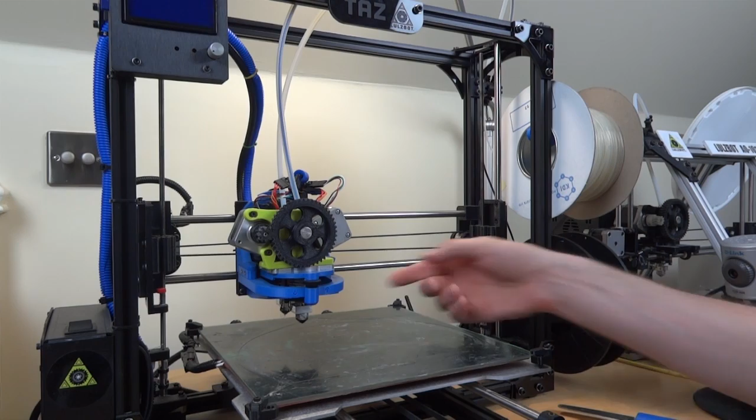So here's my 3D printer. This is a Lulzbot Taz. This is a very special one because it has dual extruders, so we have two hot ends and two materials fed in.

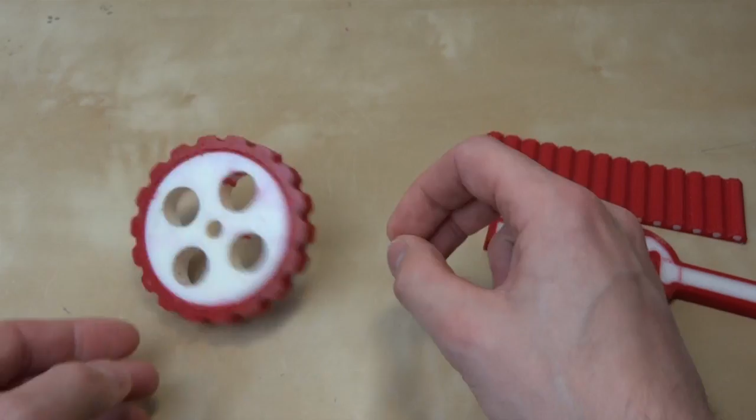One of the examples I showed you previously was a wheel printed in one go with the hub rigid, and the tyre printed on it in the same print in NinjaFlex rubber. In the previous version of Slic3r, it was a bit of a muddle to try and combine the two materials into one print. It wasn't as flexible as I'd like it to be.

There's now been another release to Slic3r, which handles multi-material prints much better, as well as a lot of other features. So let's have a look at the software.

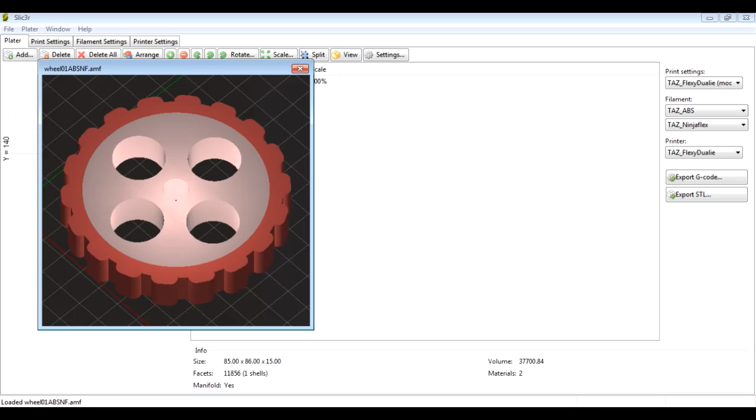So the way this works is that we start with a piece of CAD software. I'm using Autodesk 123D Design here, which is free software. We use that to design the part. In this case, we've got the wheel with its tyre on.

These are actually two separate pieces, so the hub, if we just hide it, is a separate piece in the assembly. What we'd have to do here is export these as two STL files for 3D printing. We could also export a multi-material AMF file, but Autodesk 123D Design isn't actually capable of that, so we have to use two separate STLs.

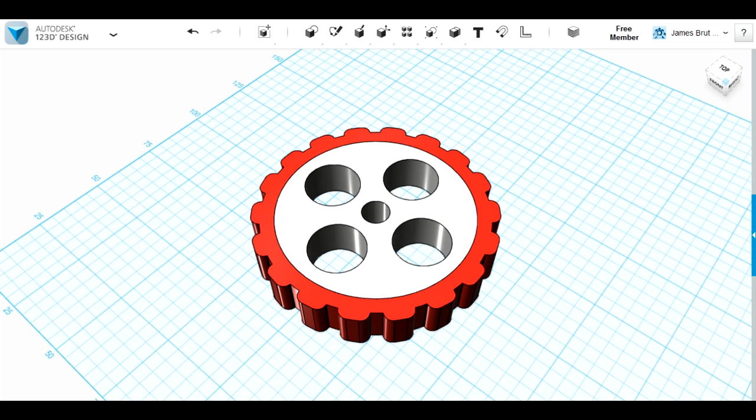Previously, when we come over to Slic3r to combine those parts for printing, we'd have used the menu option that says Combine Multi-Material STL Files.

First of all, we'd have gone and got the ABS one, and then we'd have got the NinjaFlex one, and then once we click cancel, it prompts us to save it. In fact, I've already saved the AMF file, so it makes the multi-material part for you, and then we go and get that AMF file and drag it into Slic3r.

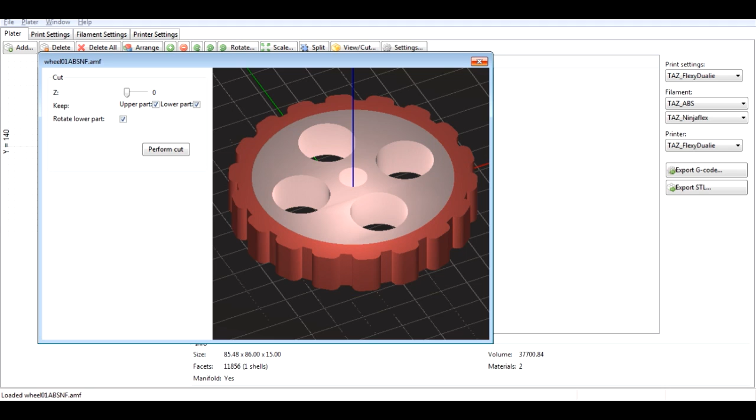Once it's processed that, we can have a look at it, and that would give us the multi-material part. So we can assign each part to a different extruder, which we can see on the right here. I've got one set up for ABS and one for NinjaFlex, and that's basically how we printed the parts before.

The only challenge is we only get one set of print settings, so we only get one set of layer height, one set of infill density, so we can choose to infill the parts as we wish, with different patterns like honeycomb.

We can also select the percentage, but there's only one set of settings, so we have to do the NinjaFlex and the plastic with the same set of infill, and we also have to print at the same speed for each part. There's only one set of speed settings. This was kind of a bit inflexible, although it worked to print the parts.

So let's get rid of that. Now what we can in fact do, this is actually the latest version of Slic3r, which is 1.1.6 at the time of recording. This has got another option where we can actually vary the settings per part.

We also don't need to use the combined multi-material STL file menu option to make an AMF file. We can just import two STLs. So basically, if we start with the ABS one and we just drag that in as usual, let's just quickly have a look at that.

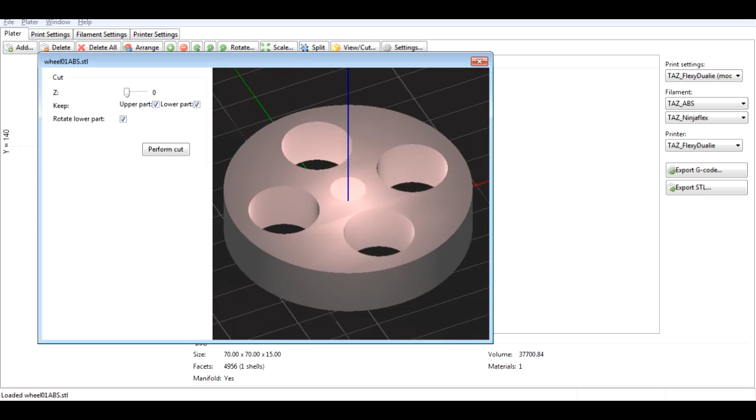So there's the middle of the wheel. And now if we go to the settings menu, we've actually got a whole lot of other settings, so we can then go and load further parts. So I'm going to now load the NinjaFlex part, and that'll do the combining for you.

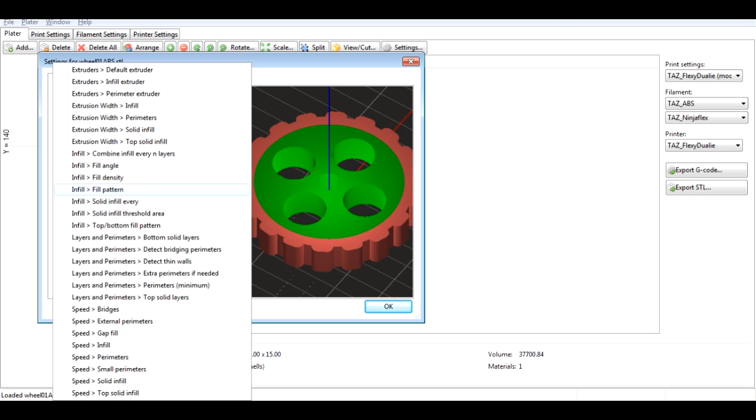And now we've got a whole set of settings, so we can say, well, the inside, I want the default extruder to be extruder 1. I want that to have an infill density of, let's see, 40% will do actually, and I want that to be infilled. The infill pattern, I want that to be honeycomb, and then I can go and look at the other part.

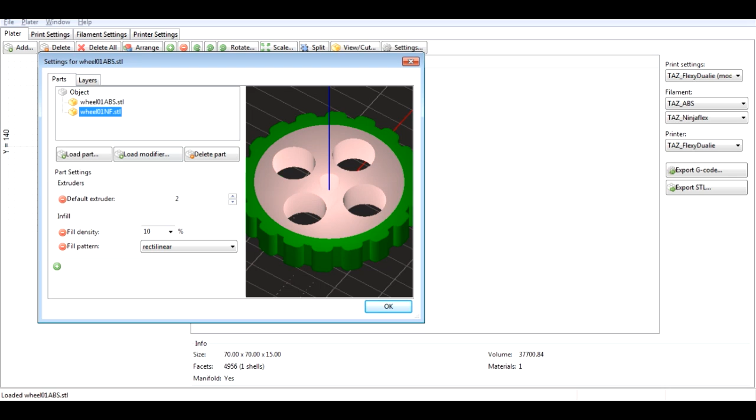And I can say, well, actually I want that to print on the second extruder. I want the infill density to be only 10%, and I want the pattern to be rectilinear. So we've got those two sets of settings, one at 40% honeycomb for the middle and one at 10% rectilinear, which is lots of lines, for the rubber.

And obviously we can have these in different densities and different infills, so we can make the rubber much softer, and we could make maybe the hub in totally solid plastic if we wanted. So the only thing we need to remember is to go back to infill here and set that to 0 on the default settings, otherwise it will ignore the other settings we just set.

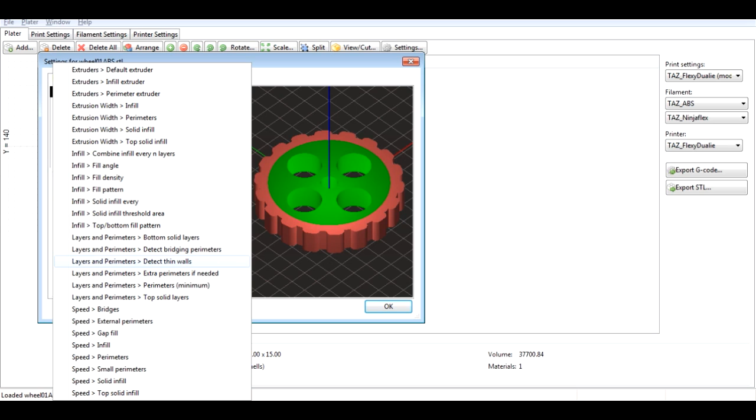And I should also point out that's not the only thing you can change. There's a whole bunch, basically every parameter can be changed for each piece. So I've already generated the G-code for that, so let's have a look and see what it looks like. I'm using a G-code viewer, which you can find at buildlog.net/gview.

This is basically visually interpreting the G-code, which is the data that controls the printer. It's a file that you put on an SD card, or use the software that comes with your printer, or Pronterface to drive it over USB. The printer follows the G-code blindly. In this visualization, blue lines are moves and white lines are extrusions, so it's a visual representation of what's actually going to get printed.

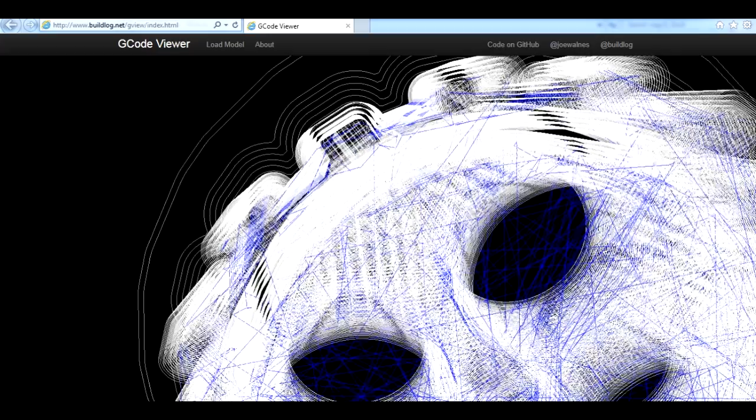We should be able to see the honeycomb in the middle there, with all the little round cells inside, and on the outside we've hopefully got rectilinear, which is a crisscross pattern. Let's zoom in on that a bit, and we can see on the outside it's just a crisscross, and in the middle you can see the honeycomb, so that's worked perfectly.

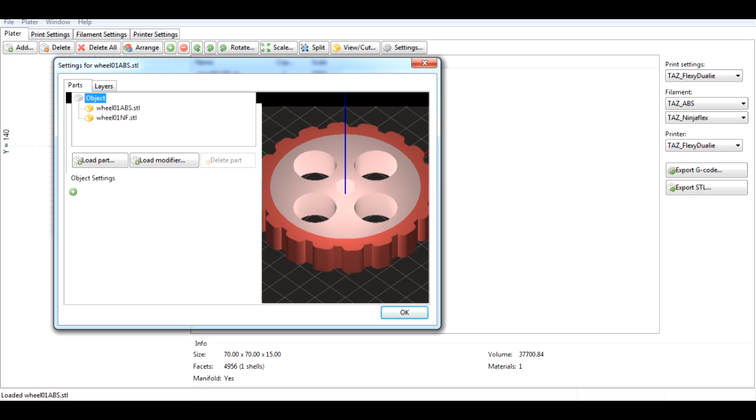The other thing we can do with this settings menu in Slicer is load a modifier, so we can load yet another STL which intersects one of the first ones. We don't necessarily need dual extruders for this — we could load one STL and then just have another one that intersects it, and set all the same settings, such as infill and speed, for those pieces that intersect.

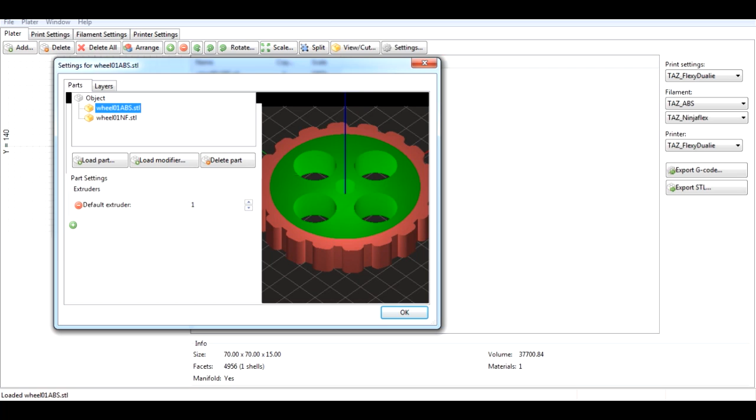So in this case we could load another STL that perhaps intersects every other tread on the tyre, and change the infill for that, so every other tread could be much softer by using a lower density infill. Even with one material that's quite useful for specifying different printing parameters for different sections of the print, which makes Slicer quite a lot more flexible than it used to be.

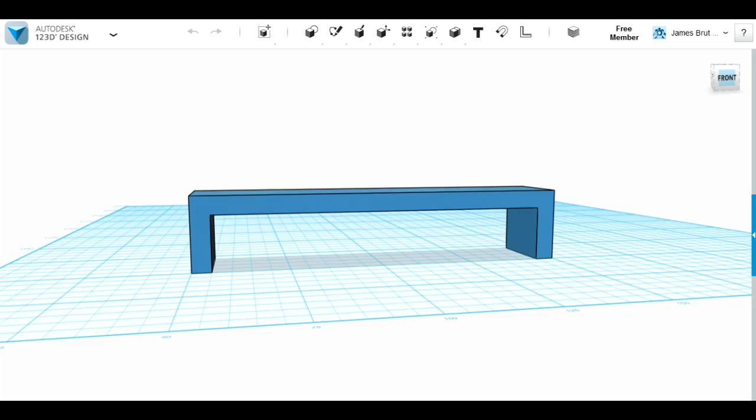Another good feature in this version of Slicer is a new type of support material called pillars. If I was to try and print an object like this with an overhang or a bridge, I'd normally turn the piece upside down and print the flat part down on the bed. But let's say I print it like this, so we can force Slicer to put some support material underneath — since we can't print on air, we'll get Slicer to hold that bridge up with some scaffolds.

So I've got the piece in Slicer here. If we go here and look at support material, and tick support material, and leave the overhang threshold at 0, it automatically works it out for you. The options for support material — previously we had the top 3 — and now we've got this new one called pillars.

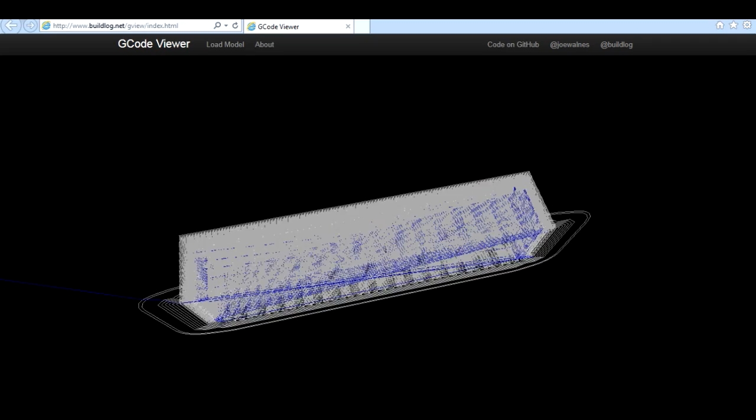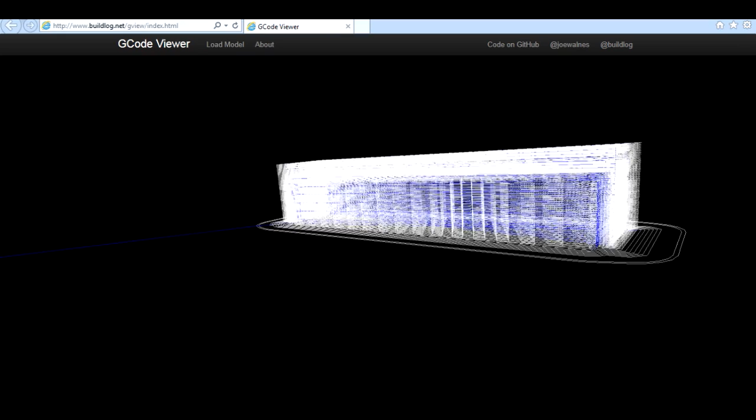Let me show you the results between rectilinear and pillars. This is the result with rectilinear support material — you can see we've got the bridge there, but underneath it's completely filled in with a zigzag pattern, which is the support material, just to hold up the print when it comes to doing the bridge piece. That takes quite a long time because it's filled in, almost like a 20% rectilinear infill, so it's time consuming and can take a while to snap the support material out afterwards, unless you've got water soluble support material, which requires dual extruders.

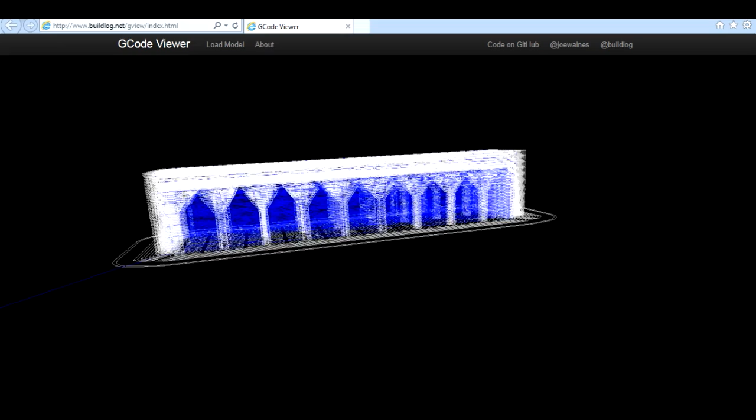This is the example using pillars. You can see here it uses these nice tree-shaped things — the stalk is much smaller, and they bridge out towards the top to hold the bridge part up. It looks a bit like some sort of Roman building, but those parts are much easier to remove, there's much less material used, which makes it quicker to print and ultimately cheaper.

So those are a couple of my favourite features in this new version. It's worth having a look at the Slic3r website and the release notes, because there's more new stuff in there. If we look at the previous versions, basically 1.1.6 is a roll-up of the previous versions with some bug fixes — most of the good stuff happened in 1.1.0.

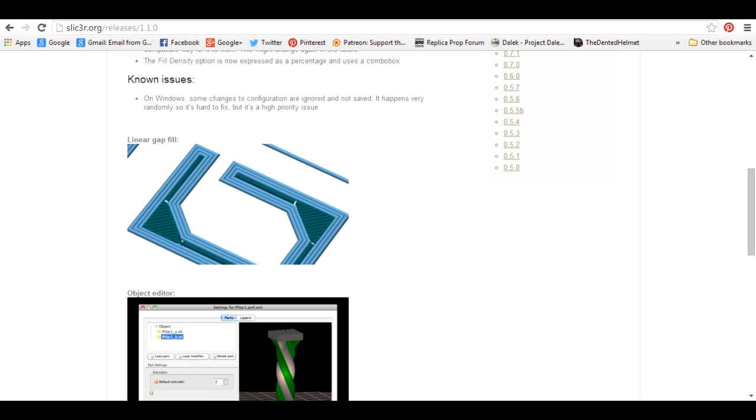We've also got linear gap fill. For doing infill in lots of small places, you used to find the printer vibrated a lot because it tried to fill it in with zigzags. What they've done now is make sure it fills it in with just lines, as indicated by the green region here, by doing a fatter extrusion to fill in the gap. That's quite a good improvement.

The object editor I showed you there, modifier meshes, and the pillars support material — I believe there's some other good stuff that went on too.

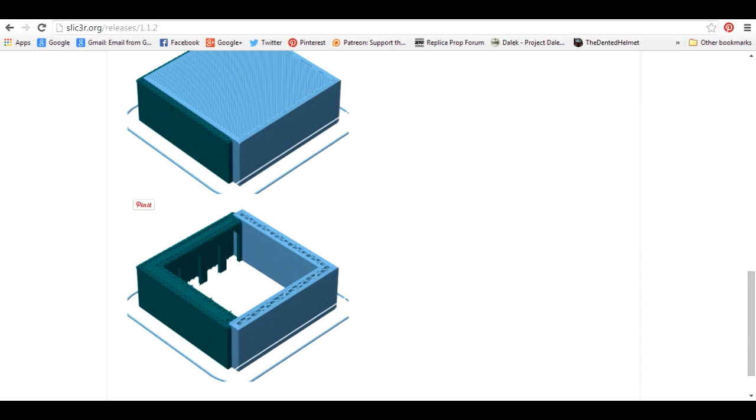In 1.1.2 there's a cutting feature as well, so you can slice an object up. They've also done some more experiments with support material for bridging — instead of putting support material underneath a big bridge, it's got the ability not to, and intelligently stretch the filament across, because depending on the settings, sometimes you can get away with a bridge if it's not too big. That's all I've got for this time.